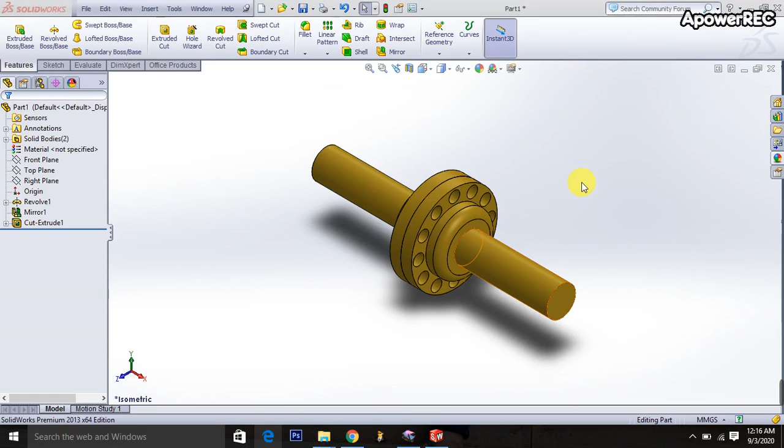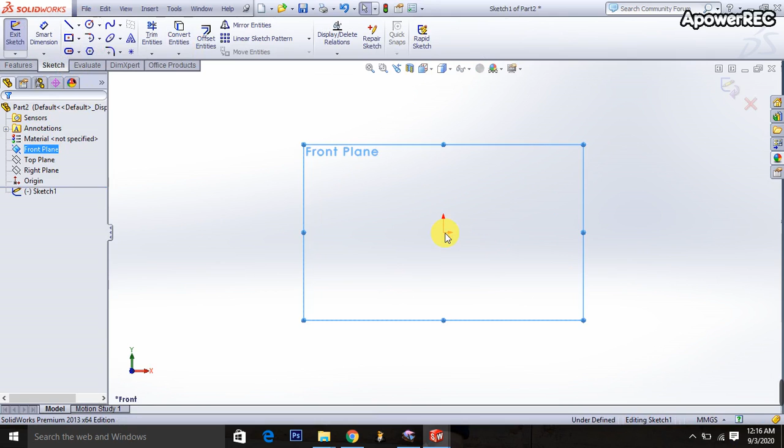So at first I'm taking the new file. Then I'm selecting the MMGS, then selecting the front plane. Revolved boss is selected, then taking the center line and sketch it. Okay, then right button is clicked and select it.

Then I'm going to take the line command and sketch it, going again here, from here, here and here, finally joining to this point. Right button select and select it.

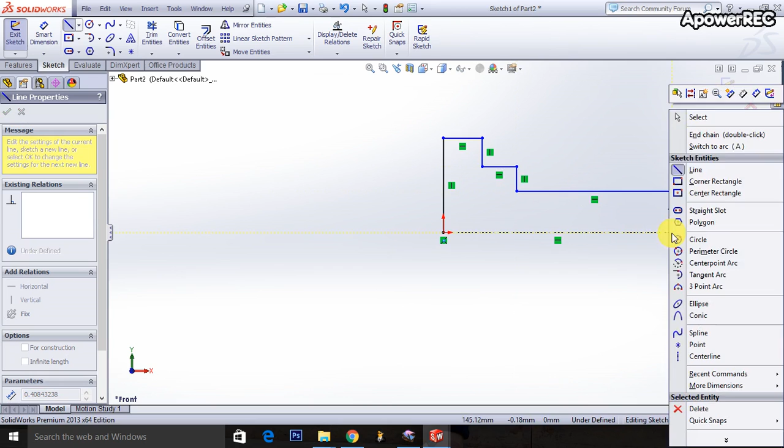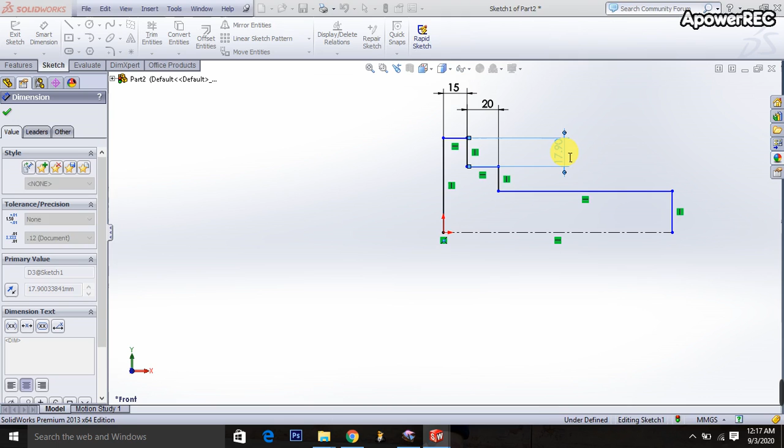Then a smart dimension is selected. It will be 15 millimeters. And this portion it will be 20 millimeters, and this portion is also 20 millimeters. This portion is also 20 millimeters, and finally this part is also 20 millimeters. Okay, done. Then I'm going to the fillet and fillet it, whose radius is 10 millimeters.

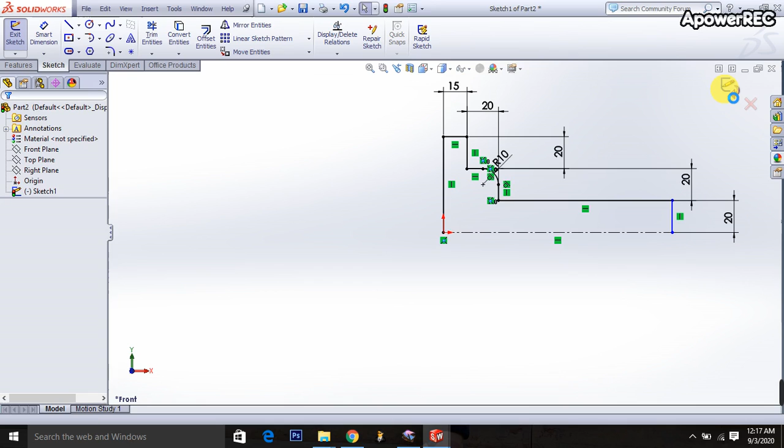Exit it. Then the sketch is currently open. A non-thin revolution feature requires a closed sketch. Would you like the sketch to be automatically closed? Yes. Then okay.

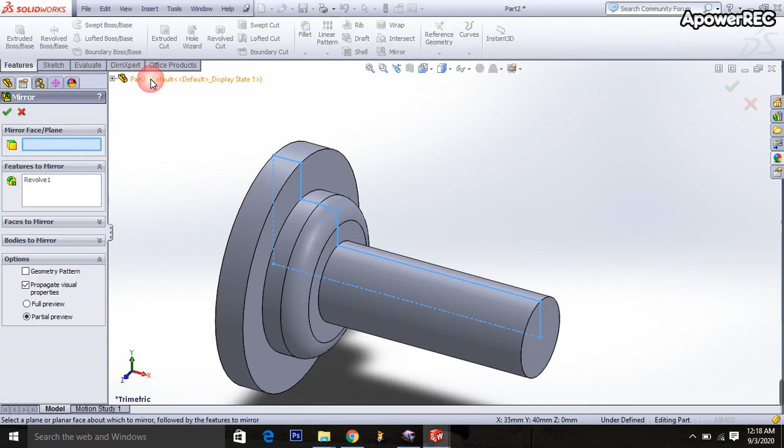Then I am going to select the mirror. Go to here, right plane is selected. Go to the bodies to mirror and merge it. Click on this surface and okay.

Done. Then go to the extruded cut, click on this surface, go to here, select the normal plane, taking the circle and sketch it. Okay, sketch it. It will be 50 millimeters.

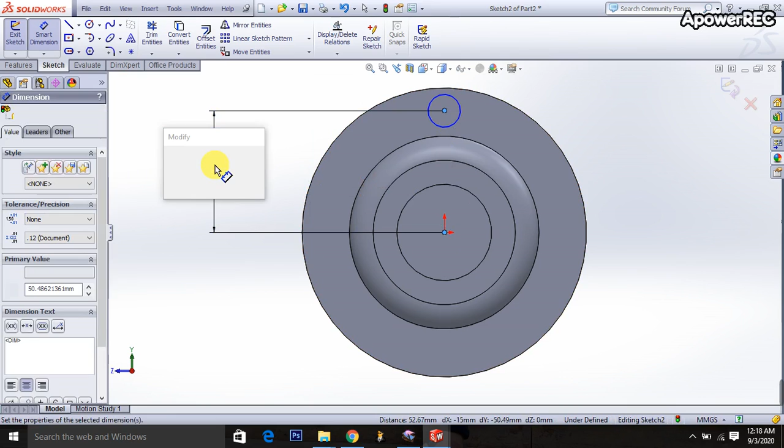Okay. Then I am taking this portion to this portion, distance is 50 millimeters. Okay, done. Then go to here, select the circular sketch, click on this portion and I am taking it 12 number of circle.

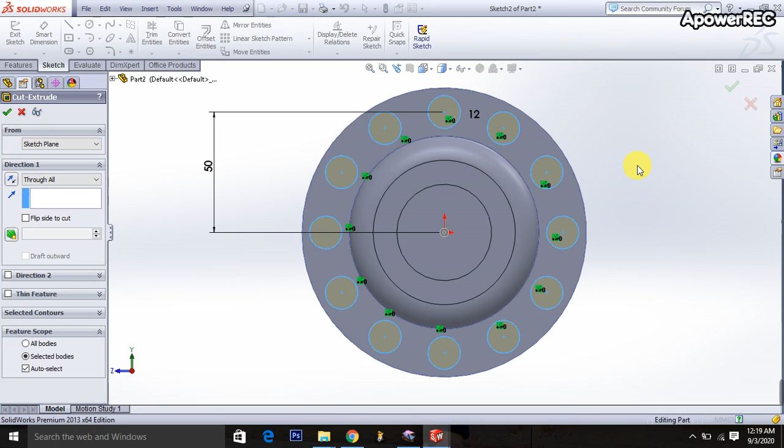Okay, then exit it. Then I am selecting the through all. Okay. Done. Then I am going to select the materials.